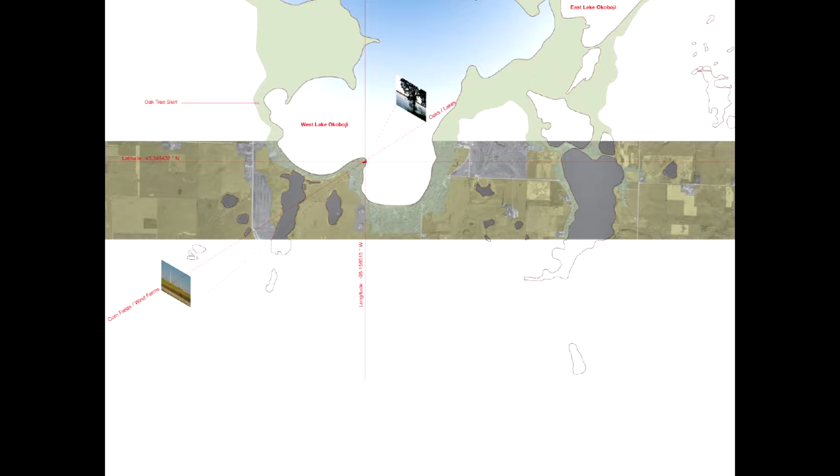When we got the commission as young architects, we were super excited. We thought, wow, we're going to do this lake house, and it's going to be this beautiful site, and it's going to be wooded. And then we got to the site. We were like, oh, I see.

We had no idea it was going to be this semi-suburban site in the middle of cornfields, where it was all super built up, and we only had 100 feet of shoreline to work with in this pie-shaped lot.

Our challenge was the clients, who were terrific, had said to us, we want privacy, and we want you to make it all about the lake. So we had quite a challenge to figure out how to do that without looking at all the other houses. How do we strip this down to really focus on the trees we wanted to preserve on the site, and the landscape?

In the house design we came up with, you can see the themes we've continued to work with. One is we created this nested mute box as our approach to the design, which allowed us to explore some interior dynamics when we couldn't do a lot of work on the exterior, given the site constraints.

By doing this, we created a house that is very deceptively simple in its overall form, and allowed for different types of spaces to occur through a series of framing devices that would be very selective in focusing how you experience the lake and the view.

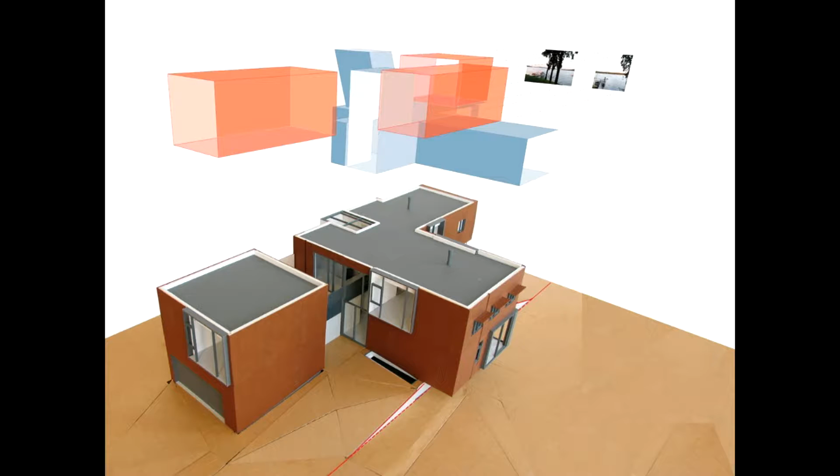This diagram talks about the public spaces in the house, and how as you enter from the road, it opens up to the view, but very selectively hiding the neighbors to the north and south. The kitchen, for instance, the only daylight that comes in is this gigantic skylight from the second floor.

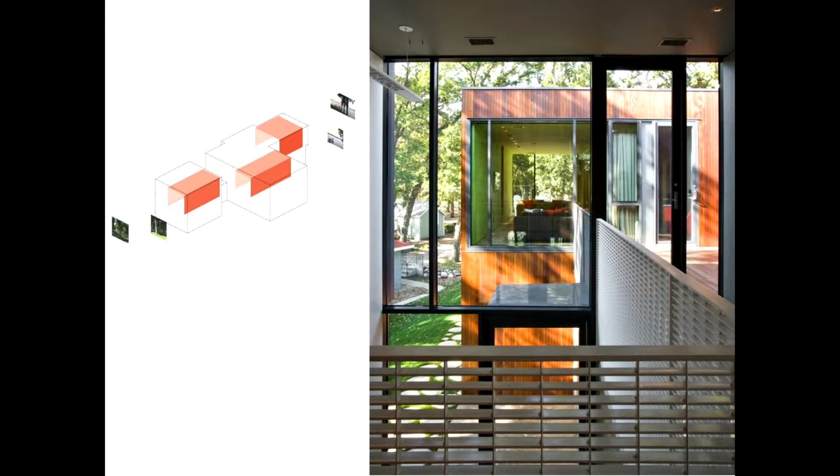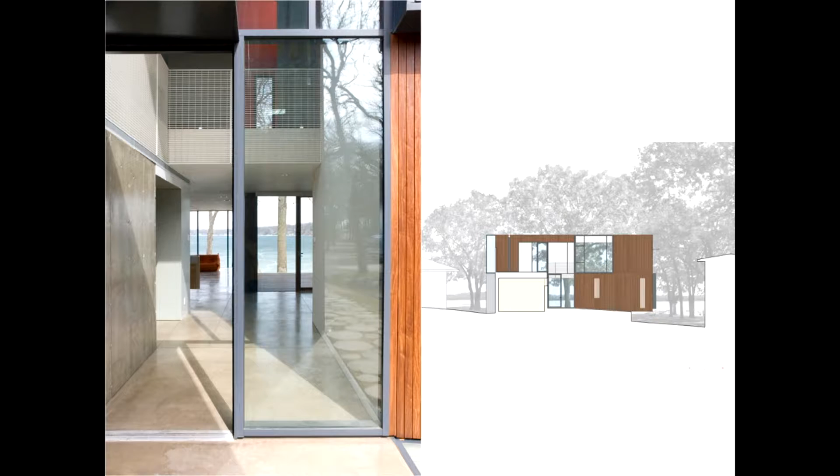As we get upstairs, we're able to reframe the views to be internal through these spatial tubes that both look from spaces within the building to the exterior. Then there's a series of how you move through the house, with again this series of framing devices.

One of the other major themes in this house was our interest in material and color. One of the things we approached with materiality was using materials that aren't precious, but using them in a very deliberate and designed way. The materials in the house include polycarbonate, OSB, off-the-shelf steel grating, plastic laminate, and plywood.

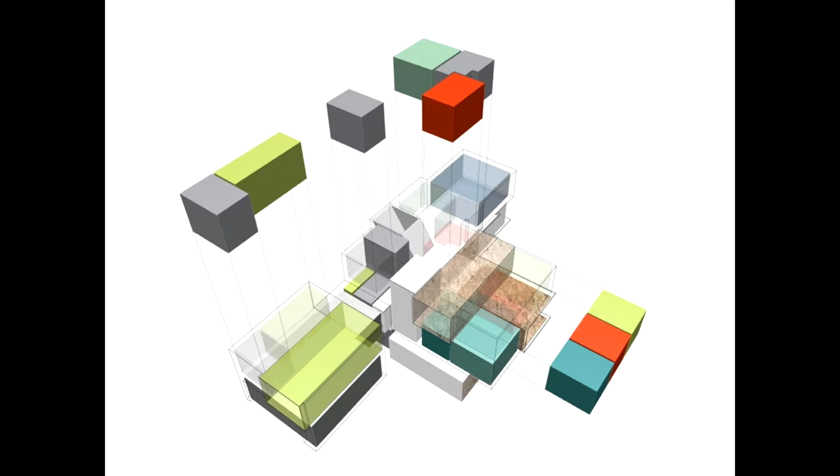We ended up using both that and color to really emphasize more intimate spaces in the house. In the public areas, they're usually mapped or related to the views, but in the more private spaces that are more internal, we were trying to use material to create a more interesting visual and spatial experience.

Here's a playroom for the kids, lined in OSB. We also used color to define the most intimate spaces of the house, which are the bathrooms. From afar you see a monolithic color, but the materials are all quite different, so once you're in the space, there's a textural difference within the space itself.

The third thing we got interested in was custom fabrication and design. This was our first foray into incorporating digital tools into our design work. We were interested in expanding our toolbox and had technique in designing furniture, and this is a headboard we designed for the project.

It's about 11 feet long and 6 feet tall, made out of stacked Baltic birch plywood. We were interested in this tension between seeing the material and how it's stacked in a way you didn't normally think of plywood, and the tension between both analog and digital craft. It's also a functional piece as it has storage behind it.

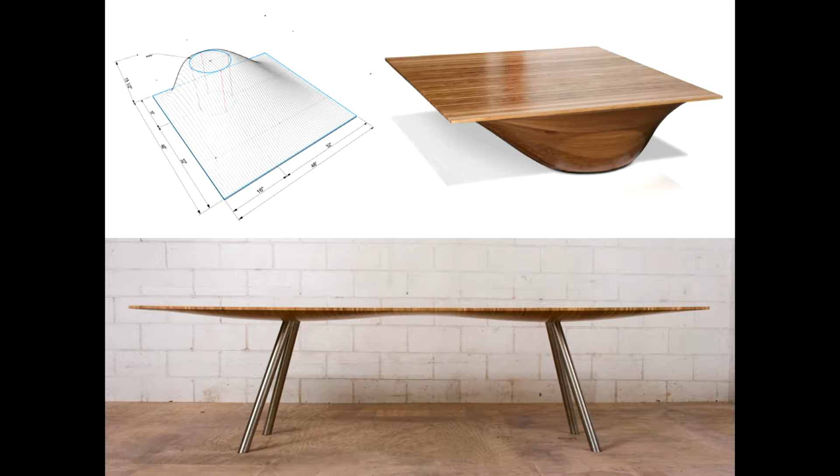We were also able to design some other custom pieces, such as the dining table, which we call the lake dining table, and this coffee table that goes from a square to a circle. These are made out of solid strips of white oak.

Exemplifying the opposite trend, the loose fit project, the Bemis Center for Contemporary Arts is another long-term client we've worked with for many years, very similar to Art Farm, but the sort of urban example of Art Farm. This is an art residency program in Omaha, Nebraska. They house about 24 artists a year, and it's very competitive to enter.

We've been working with the Bemis for probably 10 years on various projects, starting with master plans. In fact, we've outlived 4 executive directors and 3 turnovers of the entire staff.

So our relationship is longer than our clients have existed, which is a weird condition to be in. But it's really become a dialogue with this building and a building across the street.

This is also an opportunity for us to work with students. So we started a design-build organization at the University of Nebraska called Fabrication and Construction Team, which is a design-build class, but it also operates more or less as a nonprofit. We take on typically small projects that we can fabricate with digital fabrication or other advanced techniques, and sometimes very unique partnerships, which is a critical part of this.

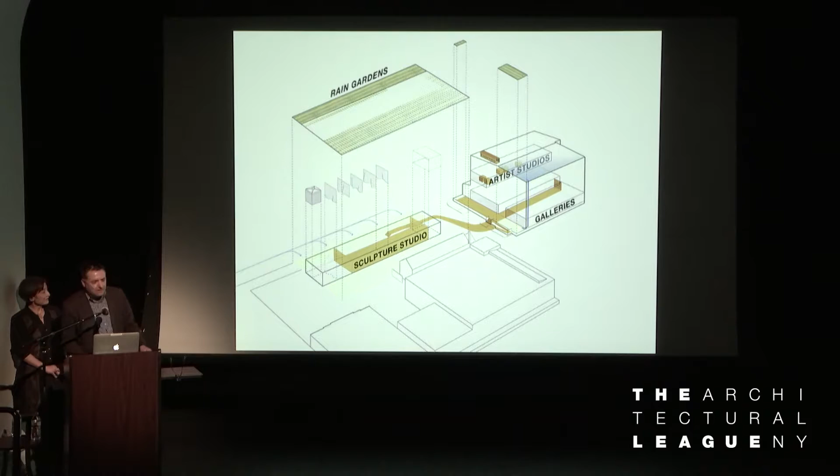So this is an early rendering of part of the master plan. And the master plan included art residence studios, workshops, galleries, outdoor space, gardens for the artists to actually grow their own food, and public space in addition to that.

Within the first floor of the main building, this is gallery space. There's a small video art cinema, and then 3 components that were actually designed and built with the students. One is a gallery, one's the vestibule, and one is a garden.

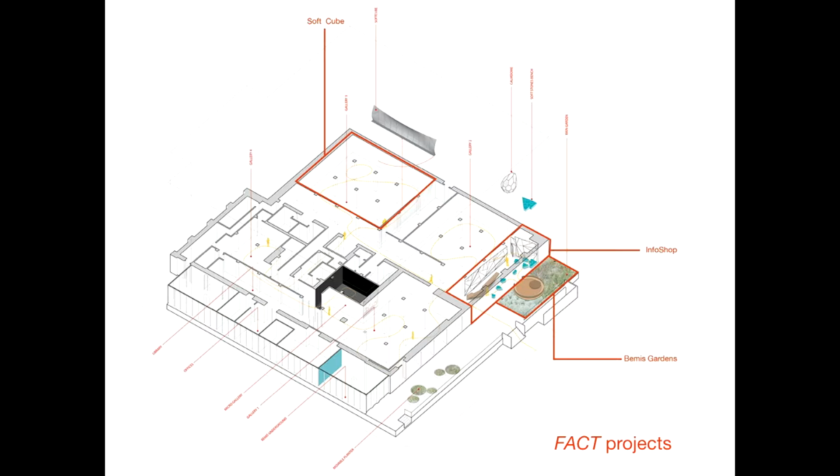So the Bemis Info Shop is the entry space. One of the things we recognized in the master plan is that when the Bemis was first built, galleries were accessed directly from the street. There was no transition, no place for dialogue. In fact, there was absolutely no place for a patron to sit down unless they wanted to sit cross-legged on the floor. So our project began with identifying this zone of space at the beginning of the entry into the facility.

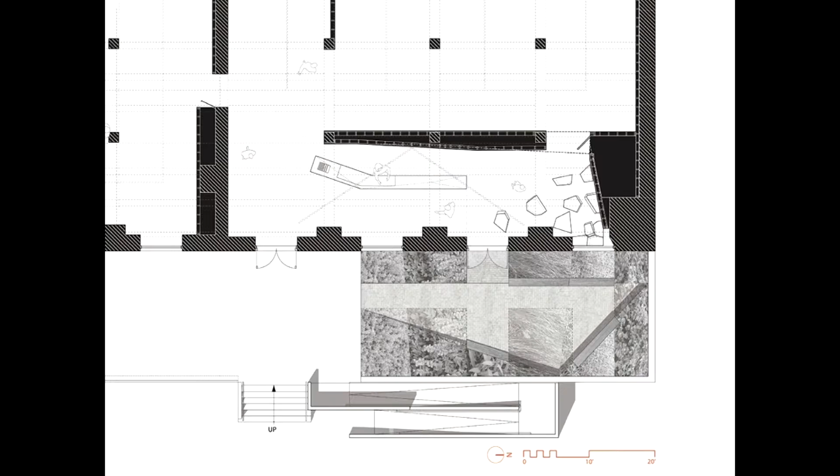It's an old former dry goods warehouse with a rigorous column grid. The column grid can be very challenging for gallery space, but was not a problem for us at the entry. We carved out this area of space. You can see the garden down below on the loading dock.

And created a zone we call the info shop, because it's really a space of dialogue. It's a social condenser, and it's not a place for display of artwork. It's dominated by this 24-foot-long desk made of edge-laminated masonite, which is a mistake. I wouldn't do that again, but it requires constant waxing.

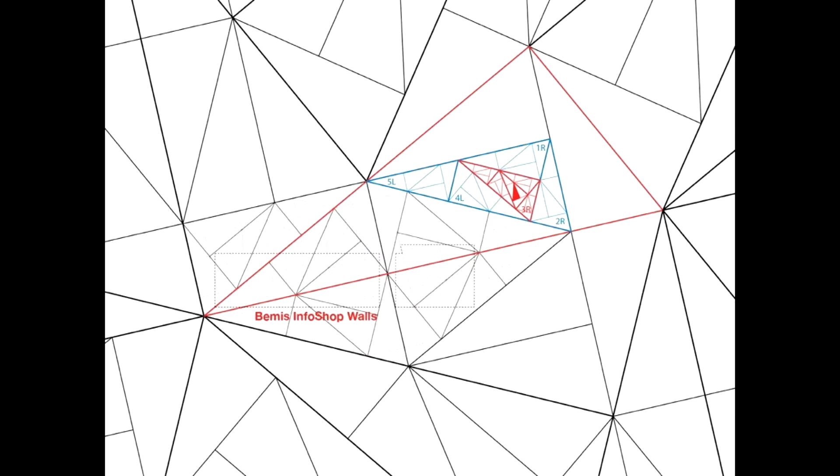And then wall panels that we created with a script that the students helped us write and fabricate. So the entire project is composed from a pinwheel aperiodic tiling pattern, which is based on a right triangle that can repeat infinitely in a kind of embedded fashion.

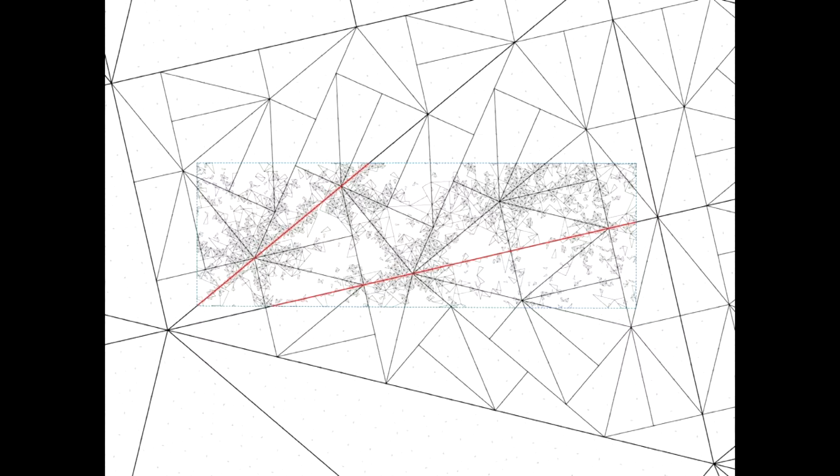The dashed lines are the components of the pattern that we selected for the main wall, with the red pieces being inflection points. Then with another script, we identified areas and ways of controlling the density of the pattern, so some areas have smaller scale components and some of the triangles are more smooth and laid out. In the end, it becomes a very complex surface that changes from one side to the next and highlights certain areas within the project.

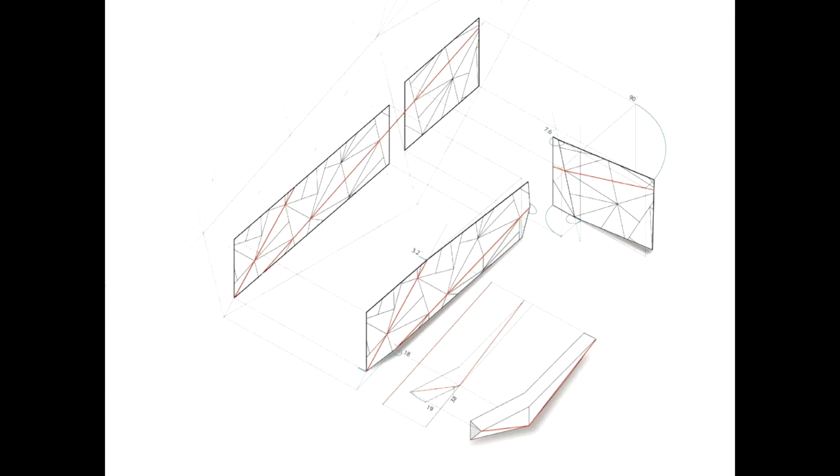So we basically take this 2-dimensional pattern and extrude it into sort of 2.5D on the wall, and then fully into 3 dimensions with the desk. It's all emerging out of the same geometric parameters. The finished piece is painted MDF. Students did all the framing and installed everything.

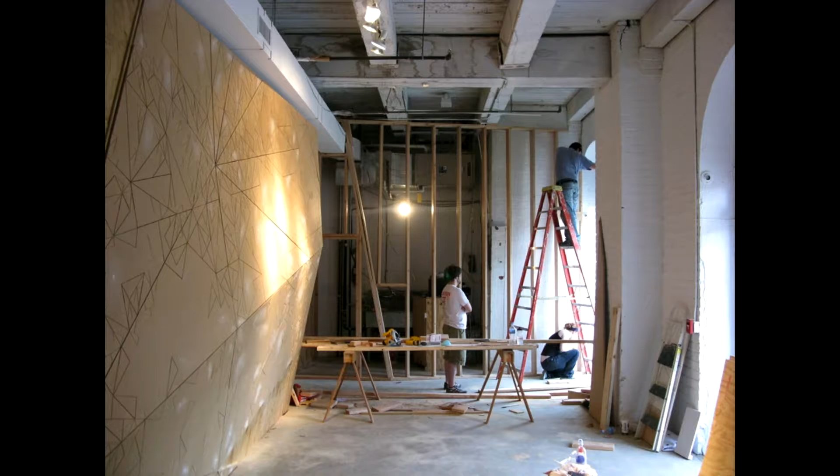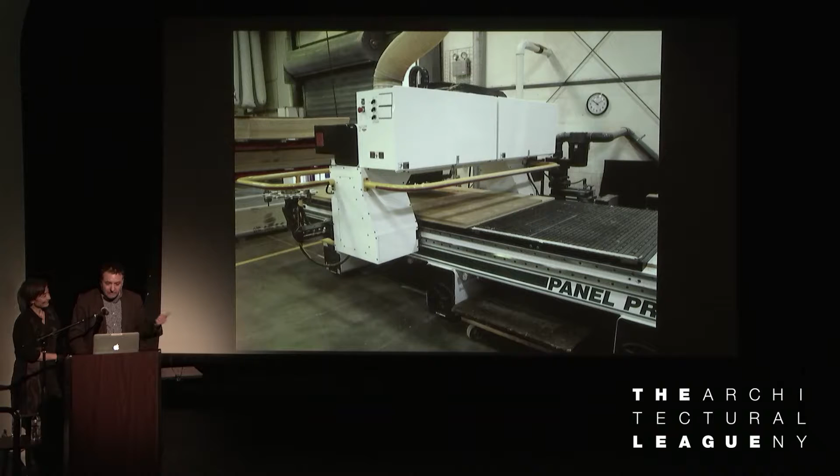We got to a point at the end of the scripting process and realized that we needed to mill about 35 sheets of MDF. We have a small router at the school, not our router, and it would have been booked for an entire semester, which wasn't available to us. So we looked around town for another router, and we found one that happens to be in a state prison.

So we worked with inmates at a medium security state prison. I'm not allowed to actually show pictures of the real inmates, so this is just a stand-in. But the inmates did all the milling, and the students would have to email code.

Obviously, they couldn't go in and out of the shop. We did go to the shop once, but it involved a lot of background security checks and pat-downs, so we didn't want to do that every day. So it involved emailing back and forth, and then the panels were delivered to us not by the inmates but by other people, and the students installed them, obeying every OSHA guideline as we completed the project.

The garden actually came later, about a year later. A grant came to the institution to build this publicly owned private outdoor space, and I mean that literally—it's actually public space, but operated by the museum on the loading dock, which is part of the public property outside of the building.

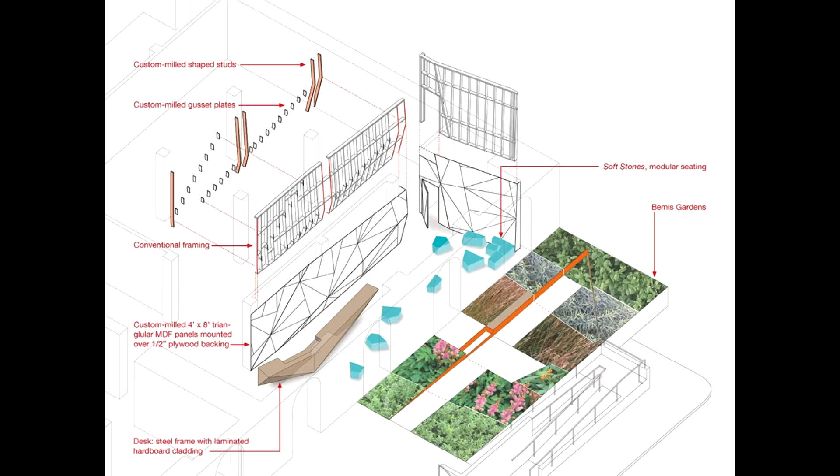Instead of designing this ourselves, we decided to host a series of 14 charrettes in the gallery. We turned a gallery into an exhibition, but also a space of design and dialogue, and spent an entire summer talking about public open space, landscape inside the city of Omaha, fabrication—sometimes specifically talking about the project, sometimes talking about grander urban design issues.

Students would work every week to realize those ideas from one charrette to the next, and then another group of artists would come in and run a charrette. In the end, we built the garden at the very end of that summer, composed of native plant material, crushed auto glass for mulch, salvaged brick, and so on.

I think this is the project that we like to say has the most conversation per square foot of construction of anything that we've ever done.

Another piece is the Bemis soft cube. Todd Williams actually spoke here in a lecture a few years ago. This was a conversion of one of the galleries to be really more of a supportive space for performance and event. It works as a series of infrastructural devices that support activities.

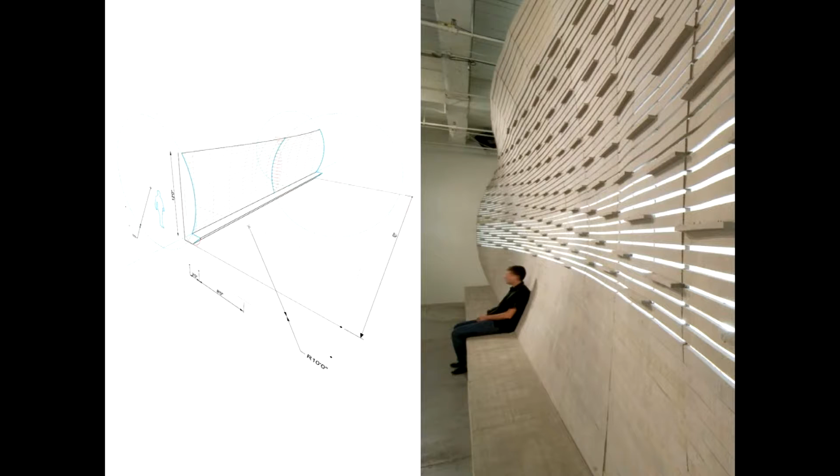There's a stage, there's a fan to convince people that there's air conditioning when there really isn't. There's this acoustical baffled wall, which functions as an acoustical baffle—that was its primary purpose. It also works as a bench and an ambient light fixture for the space.

This was built, again, with students for about $1,500 using CDX plywood and Homosote, which we sanded by hand. You can see the surface being installed, and then in the end.

What we liked about this piece was that when you look at it straight on, it appears very stable and flat because of the orientation of the striations, but from certain angles you can see the sort of potato chip form start to emerge and become really dynamic.

So it transforms a gallery from a place of display to a place of social engagement and dialogue, furthering this notion of the gallery as a social condenser more than simply a place for exhibition.

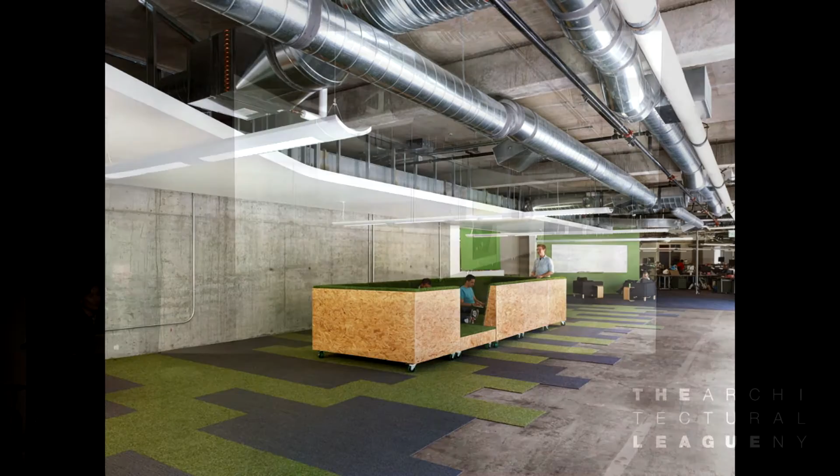One of the great things about not being co-located is that our practice ends up having a kind of dialogue established between practice, teaching, and our commission work and pro bono. The work that Jeff has done with students out in Nebraska has really directly influenced and helped us with the work in San Francisco.

Around the same time the Bemis stuff was getting completed, we started taking advantage of the big tech boom in San Francisco and began doing work for startups. Usually they want everything fast, cheap, and great, which I think you guys alluded to is not possible. So it's not possible.

But what was so great about the work we've been able to do is that while it's very deliberate with custom fabrication, the work has been done very quickly with very inexpensive materials. I think that has really benefited us in some of the work we've done with office interiors.

There's also the idea that there's this huge office space full of desks and junk, but we're really focused on creating moments of social interaction that are much more concentrated, much more interesting than the sea of desks. This is something we did.

It's a parklet, like we like to call it—an interior parklet inside a park. This was for a company that was growing very rapidly and would soon take over this space as desk area.

It's made out of actually OSB and Sin lawn. But then for other companies, we were also able to create mobile meeting units, which again rely on CDX plywood, because we've been so interested in how you create places where people can congregate and gather in these very large and open plan workspaces.

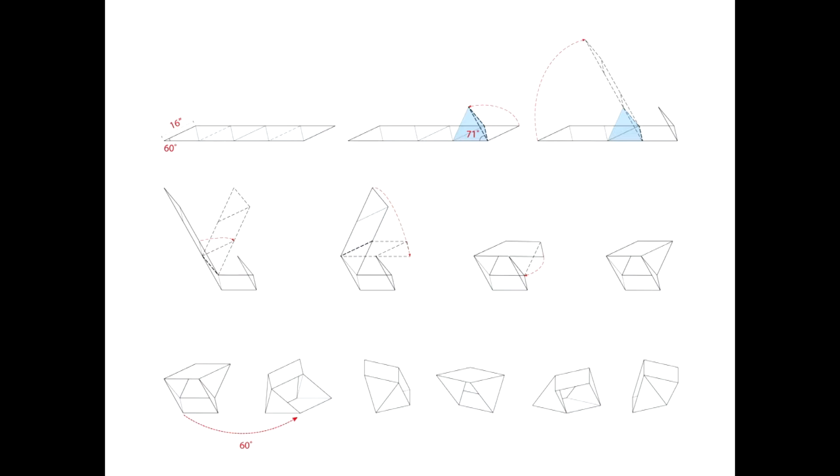This is a stacking unit we call Ava, and it can be configured and reconfigured into a variety of forms. You can see we have a single unit, and it can become either a wall or a tower. Right now, there it is, and we just completed it. It's for sale in the lobby after the talk.

So the Blue Barn Theater, this is the last project we're going to show. This is a building we completed in September 2015. It's actually three projects in one, and it came to us—

we were the third architect to work for the Blue Barn, which is usually a bad sign that one might want to think twice about. But this is a very particular client that has a very deep concern about their culture as an institution. They're a nonprofit equity theater in Omaha. They've been there about 25 years, and they were in an old warehouse.

They really had a need to grow a little bit, but they were very, very concerned about maintaining the character of their space—not just its image, but the way they improvise daily on their building and in their building. They didn't want a glossy new contemporary theater, but they did need some upgrades. They certainly needed a better stage, restrooms, all of the sort of things you might expect.

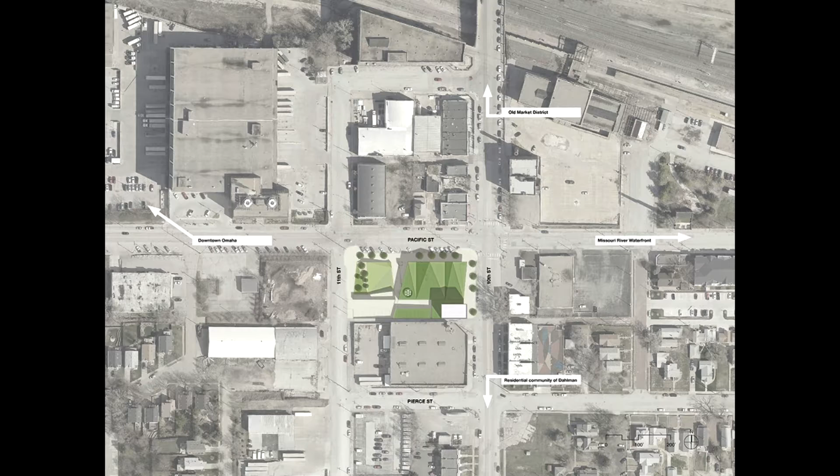The project, in the end, became a combination of three different projects. It sits south of downtown Omaha, just south of the urban core, at the juncture between a warehouse district and a working class neighborhood that's very rapidly developing. In fact, there are several other projects ongoing in the neighborhood after this was built.

So the three projects here occupy a half city block. The first one is the Blue Barn Theater itself, and then the neighbor is Boxcar 10. This is another commission, a separate client, completely separate contract, but very related. The owner of Boxcar 10 is a board member of Blue Barn.

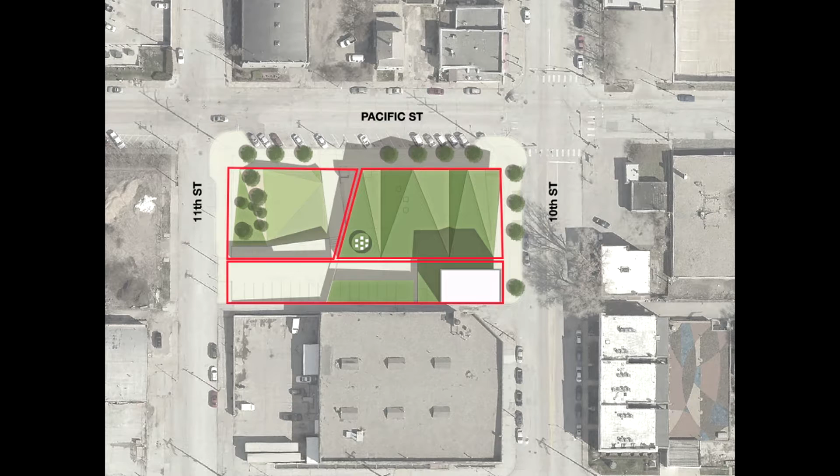She wanted to build a mixed-use building to create a sort of dynamism in the neighborhood at the same time that the theater opened, thinking it would support the theater in many ways. Then the third piece came out of our design process. We had this leftover piece of land that wasn't really necessary for the amount of program we were working with, and we proposed to make that a public open space and hold a national design competition in order to select a winner. I'll show that in just a minute.

But this project, when you think about the theater itself, goes back to our initial thinking about the neutral space of the white cube, and the converse of that in the theater world is the black box. The black box is something that emerged in the 50s and 60s with a number of theater artists who were really interested in creating spaces that were more flexible, where there could be different relationships between actors and audience, apart from this sort of proscenium that we're in right now.

It's an idea that emerged out of a desire to go back to something a little more like the Greek theater, where the actors could move around and the audience was on all sides. Peter Brook was an influential figure in this world, writing about this desire—he called it the empty space, but the empty space wasn't meant to be about neutrality. It was meant to be a space where actor and audience could come together with minimal means, that basically anything could be a theater as long as you had actors and an audience. This was a really important piece, and it was actually very influential for our client.

The quote here is written by Joshua Dachs, the theater consultant we worked with. He was on the job before we became involved. Fisher Dachs is the firm here in New York, a very prominent theater consultant.

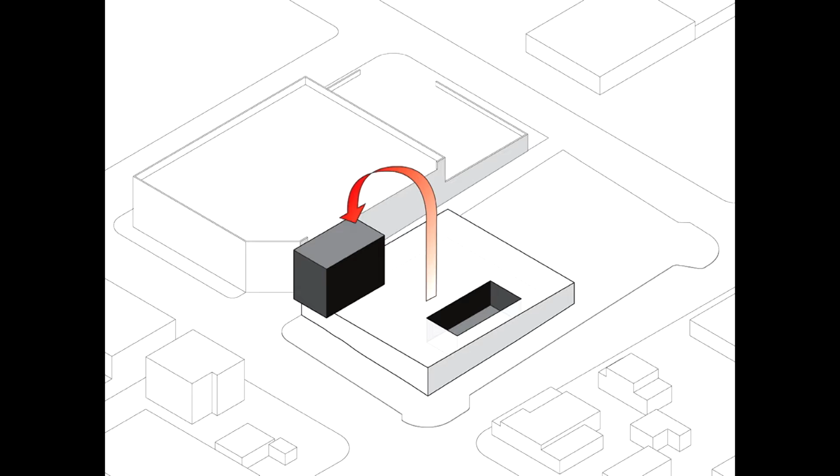So when we started to work on the project, we thought about the volume of program on the site, metaphorically thinking about the black cube of Boxcar 10 as the excavation of the theater space starting to emerge out of this block of program.

Boxcar 10 here on the left is 3 floors of apartments above a restaurant, a tenant restaurant space. The base of the building appears to be continuous, but these are actually separate buildings with separate foundations, separate services, and so on.

The back side of Boxcar 10 is almost a black and white photograph where the materials are very mute. And fortunately, someone parked a black car there when we were photographing it, which helped us out a lot.

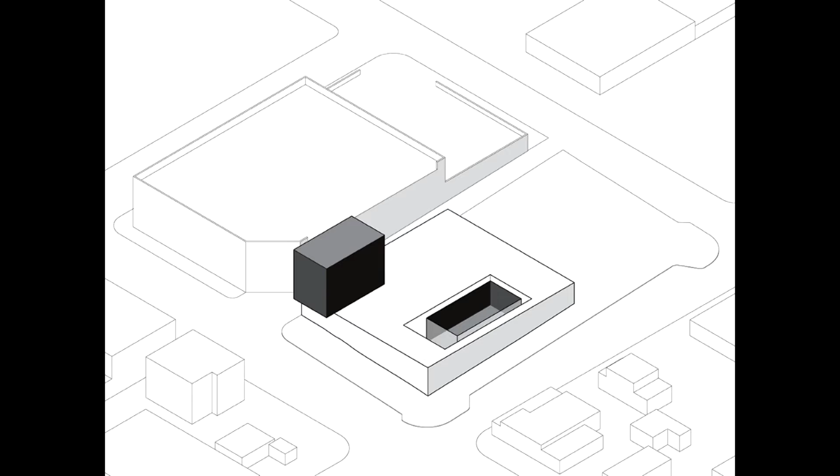The theater becomes a sort of concentric development of space surrounding the actual performance core. You've got the theater, you've got the circulation and the acoustic buffer, then in blue this public zone of circulation around the building, and then the green space started to become part of the conversation in the design, thinking about how that could become an adjunct to the theater itself.

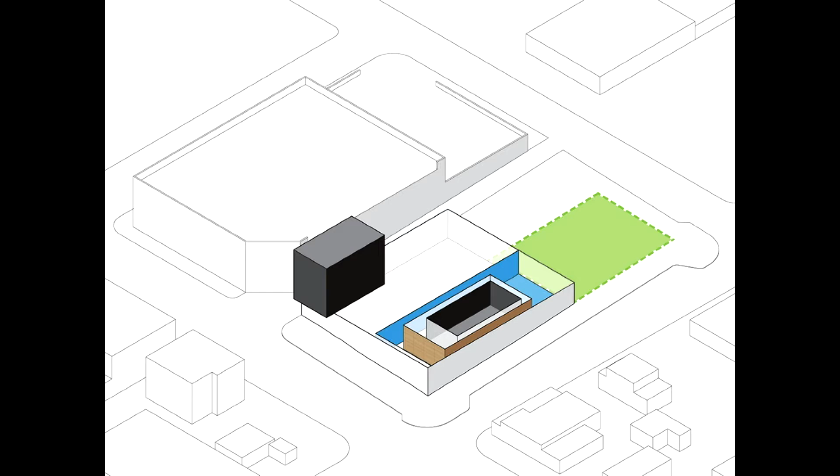The form of the building essentially emerges out of forces from program pushing and drainage needs pushing the other way, creating a kind of inflated roof that's flat on one side and gabled on the other.

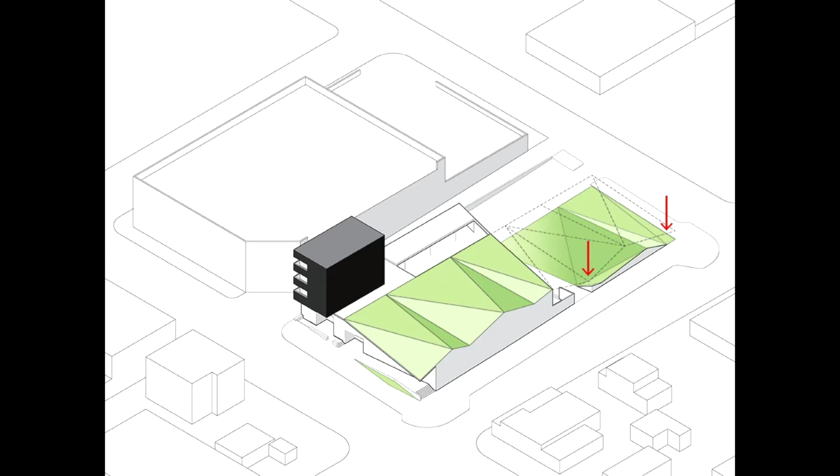Through the competition, the winners—El Dorado Architects and Urban Rain Design, a landscape studio—proposed creating the green space as essentially a collapsing of the roof to create a slope for watching performances at the back of the theater, but also thinking of this as a way to collect rainwater from the roof and use that to irrigate the gardens, and maybe turn that into a performance event as well.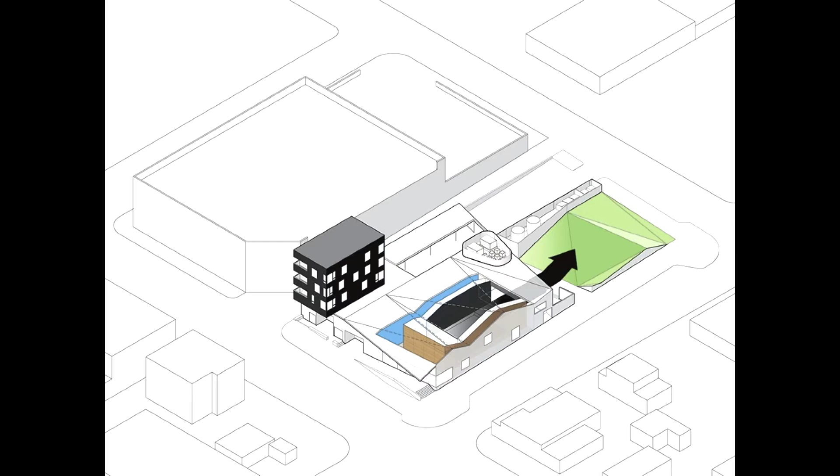So in the end, this becomes a sort of infrastructural machine for theater that allows the theater as a black box to expand out into this green space.

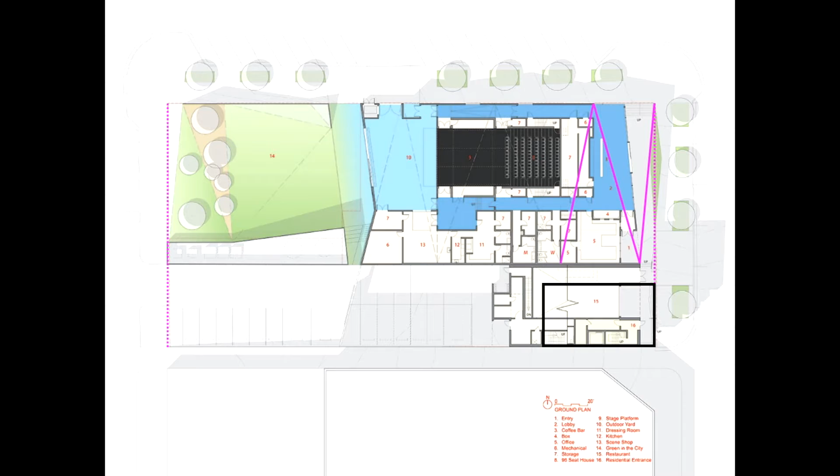Here's the plan. You can see the theater in black, obviously, with fixed seating and a stage. So it has some traditional aspects, and then some very untraditional ways that it starts to engage the environment. Geometrically, it starts with the property line, then the box of Boxcar 10, and then the roof form pretty much doesn't pay a whole lot of attention to what's going on in the program at some point—then you can see the garden kind of running through in the end.

The roof of the building originally was going to be a green roof, but the city of Omaha wasn't terribly happy about that. The fire marshal told us it was the stupidest thing he'd ever heard of, putting grass on your roof. So we sort of stopped pushing that idea.

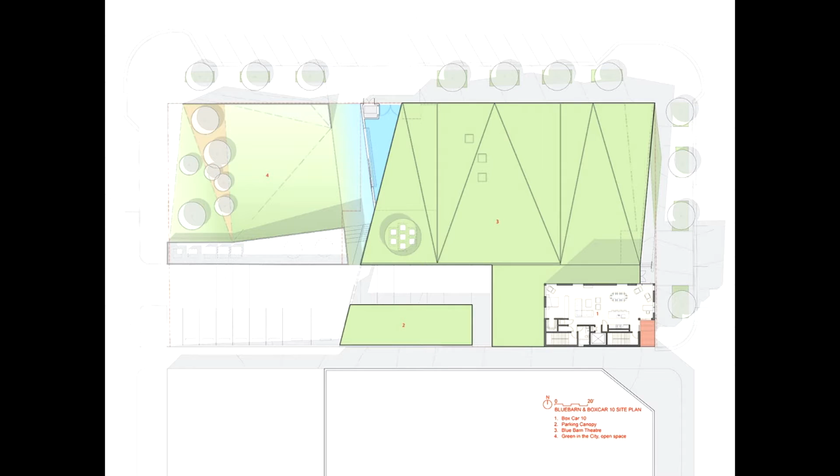It will eventually be artificial turf. That was left out of the construction because of budget reasons, but it'll come back as an artificial turf roof at some point. At the backside, you can see the green space starting. This is right after construction, so the green space hasn't really evolved yet.

But you can see that the theater starts to open up into that space when the gates are open. On the north side, on the street, the building follows the grade slightly, the gentle slope of the street, as a sort of blank wall, almost a diaphanous curtain over windows.

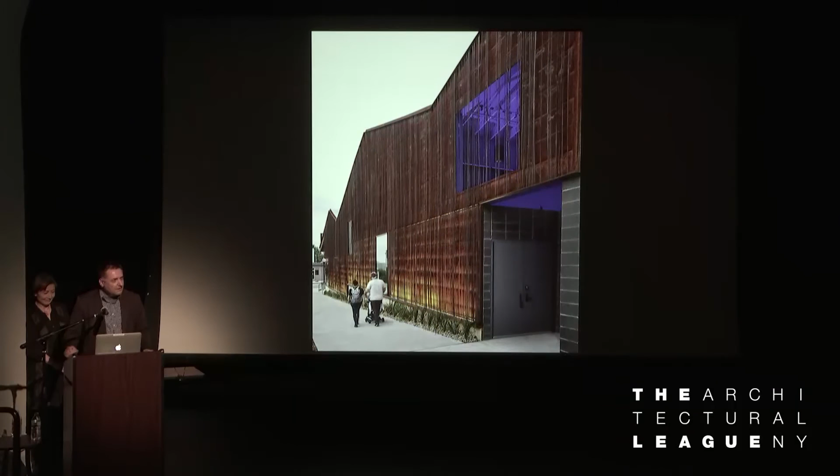And here we started to really become interested in a quality of materiality on the building that evolved over time. So Corten steel, of course, is a natural solution for a material that's both evolutionary, but also fairly affordable to maintain.

This began as an interest in trying to think about how we can reintroduce materiality to architecture. Most working architects know that American construction is based on the notion of products, and most contractors want to know what the product is and who holds the warranty, and so on. It's very hard to get a general contractor to really work with materials.

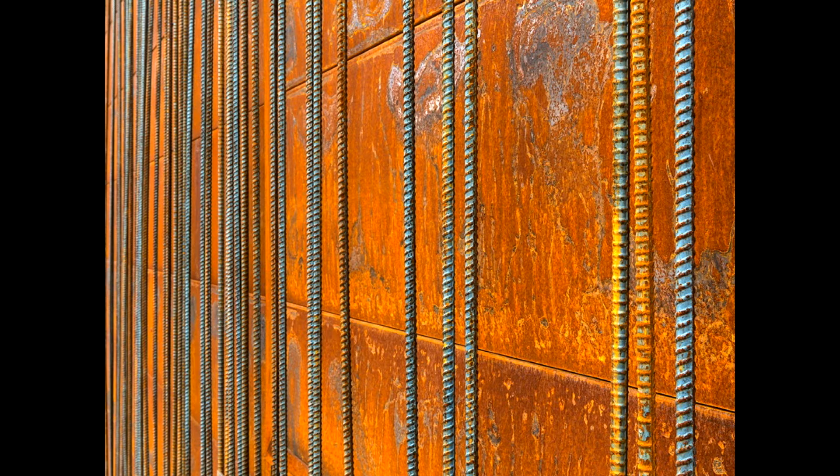So we proposed hanging rebar in front of the building as a way to create a layering effect over the Corten panels. They kept trying to find a product they could stick on the building that would look like rebar, but they never could. So we won the argument with them because they had no alternatives that came anywhere near this.

I won't go into the long story of how this came together, but it ended up becoming a process of welding individual bars, top and bottom, and at the mid-rail all the way around the building, so about 3,000 rebar lengths around the building. We tried to propose panels and a whole other series of things, but this is what they wanted to do.

At the entry porch on the street side, the rebar pulls away from the building, so one can actually occupy a space between the bar and the building itself. This exemplifies one of the things that helped us secure this client's interest - we made it very easy for them to think about ways they could modify the building by themselves. After construction was done, they added this logo with spun rebar and welded it on themselves. We took a lot of photos before they did that just in case, but it actually doesn't look that bad.

Towards the entry, the color of the interior comes out. The rebar stops at Boxcar 10, so Boxcar 10 has the same Corten cladding, but without the rebar over the face.

One of the other aspects of our project that won the commission for us was that we proposed to give up a reasonable amount of our fee to a series of artists who would be commissioned to design and build components of the building with minimal input from us. So unlike a conventional artist relationship with a building where someone comes in and they're commissioning a work that might hang on a wall or sit on a floor, this was actually part of the necessary components of the building.

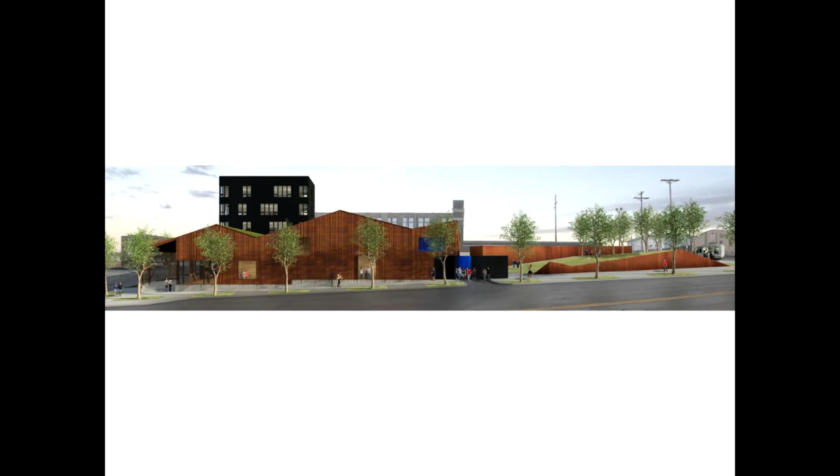This is an early rendering of the north facade, and then you can see how the section works with that - the theater in the center, and then the lobby and the outdoor performance yard, which is an outdoor space that is covered between the theater and the green space. This really allows the building to open up dynamically in both directions.

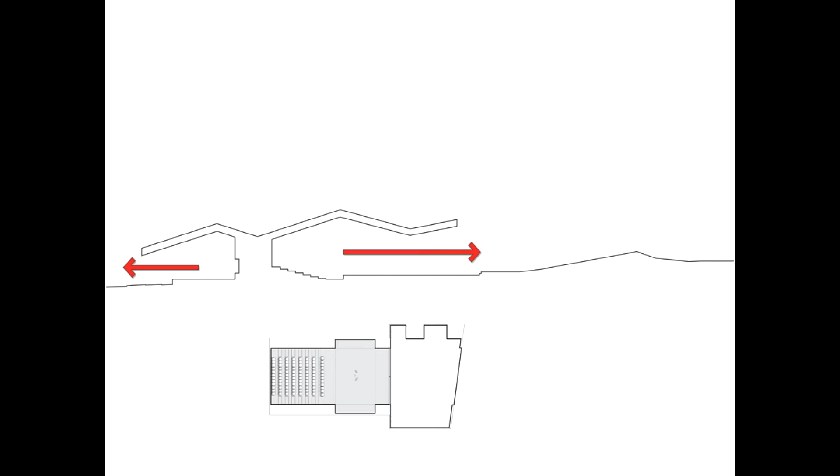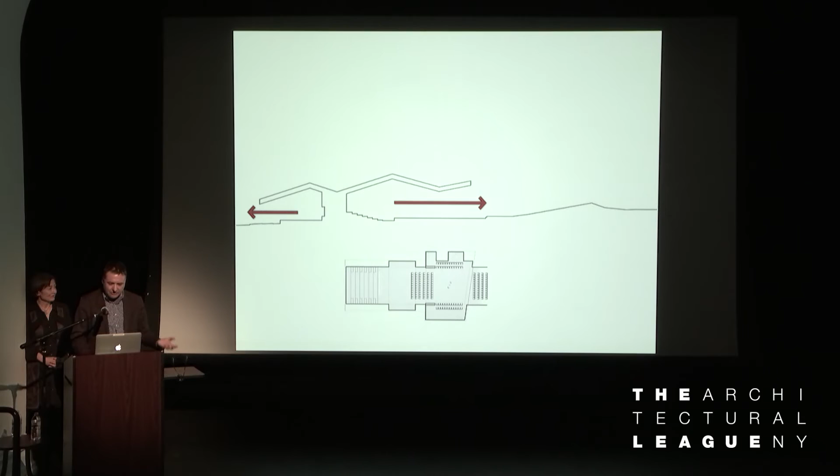So the theater, on one hand, could be your sort of standard fixed seat, proscenium and stage, or you could do something like an alley theater setup with seating on both sides of the stage, an arena stage setup with seating all the way around, or move everything outside and have a performance of the same character in the exterior environment.

The theater here, you can see the entire space with the seats. It's only about 10 more seats than their previous space, so this was not a grand enlargement of the company, but just a new space that works a lot better for them.

So thinking about how that space is really composed, we went back to the notion of the proscenium as a frame—fixed seat, frame, and stage. We thought about expanding this into a series of parallel frames that created different opportunities for theater artists to stage shows in very different ways, so they can occupy any zone within this.

And then there's a cyclorama curtain that operates around the stage so you can open the stage on any side. And then the components—rigging steel, the roof, the acoustic walls, and all the other things that make a theater work.

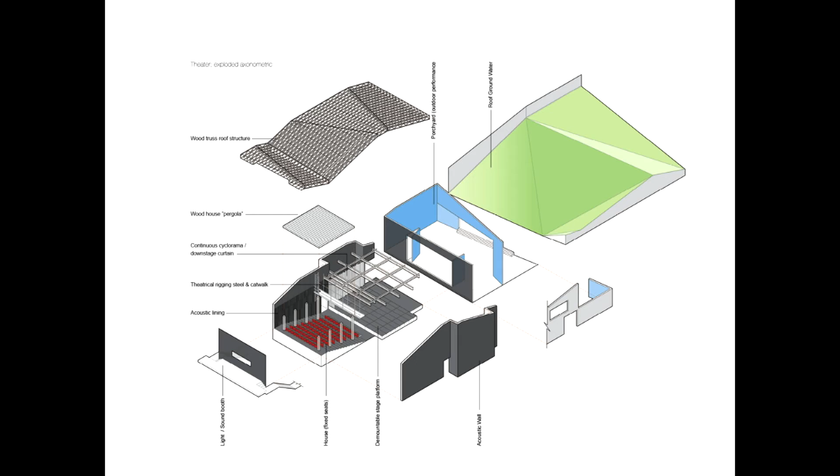But probably the most interesting part of the theater itself is the door that opens up to the back. This was another artist commission. We hired a guy named Chris Kemp, who's sort of a mechanical genius in Omaha.

We asked him to build—well, here's a situation where we talked to the contractor. We need a 34-foot wide, 12-foot tall, multi-swing door. They came back with $150,000, $200,000, blah blah blah. This guy said he'd build it for $12,000. But we gave him $20,000 just to be sure there weren't problems.

He custom made every hinge, every component of these doors, including the sand cast aluminum handles, the door knobs. Essentially these are 16-inch wide handles that you turn, and all the mechanisms are entirely custom made in his shop. And these doors work perfectly well.

The idea was that an actor could use this as part of the performance. It's not simply a mechanical door that operates by the push of a button, but something that can be operated live, opening up completely or partially to the performance courtyard.